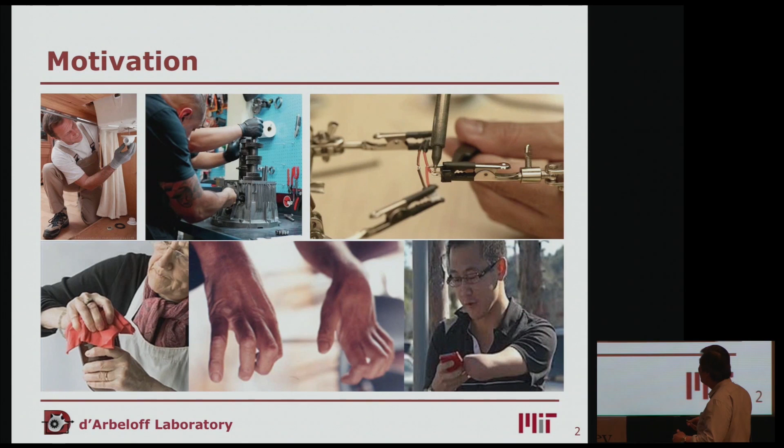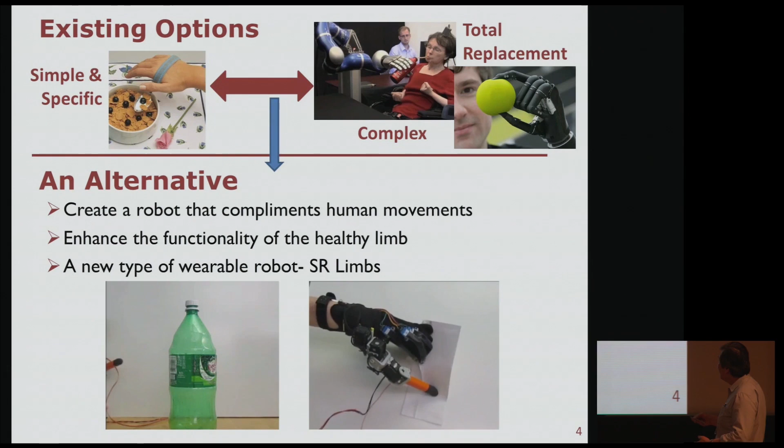If you have a hard time in the fingers or lose a hand, we can help you. But the traditional method is just using very simple ones or complex ones for total replacement. Our approach is to take the existing hand and provide a robot to complement the human movement, and we enhance the functionality of the healthy hand. You know how difficult it is to open it, like this? We focus in this paper on grasping. Grasping is the most fundamental part.

We explored many objects to grasp, and we did find that the 7 fingers have a very strong correlation among them. They don't move independently. It resembled the postural synergies in the neuromotor literature, and we hypothesized that there exist synergies even for 7 fingers. So because of the synergy, we must be able to control these robots in correlation to the actual hand you can measure. So we took a lot of data, 20 objects, 5 trials, including 20% validation data.

And you know Santello's famous work: 2 principal components of finger postures can explain 80% of the task. One is opening and closing in phase, and the second one is kind of a twisting action. Interestingly, even though you have 7 fingers, we got almost exactly the same results. The first one is just open, close in phase together with the robotic fingers, and then the second one and the third one. If you add all of these, you get 85% of the recovery.

So because of the synergies, we should be able to control these robot fingers in correlation with the human hands. So we'd like to find the control algorithms to control these. To do this, we first put all the human finger data into the input data space, and the robot finger postures in the output space. We try to find the functional relationship between the two based on partial least squares. So this is really a data-driven method.

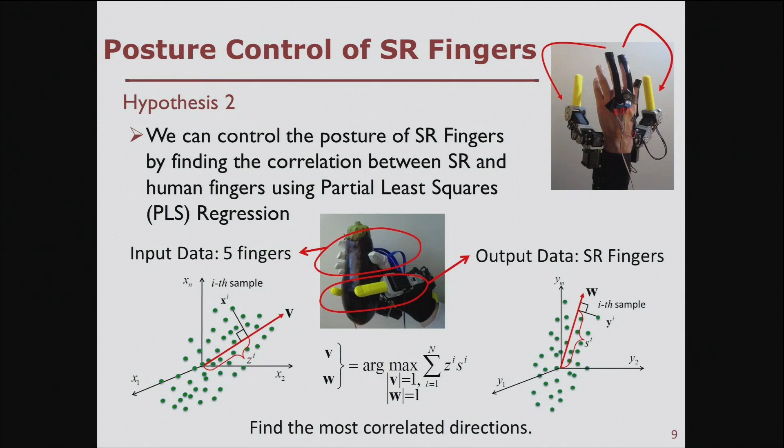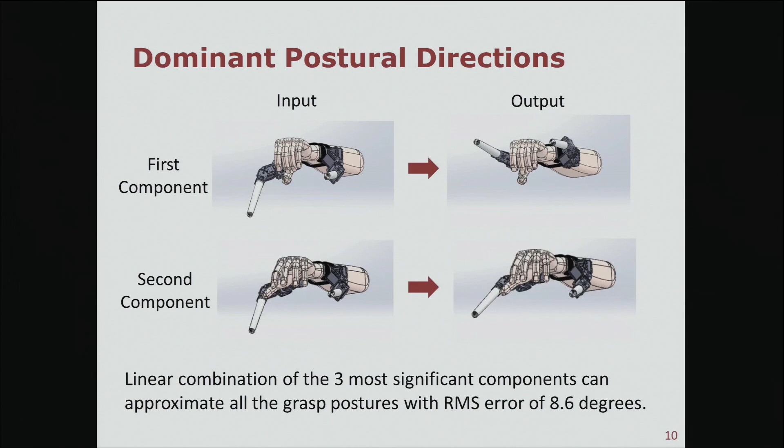The first mode shown next is similar to open and close of fingers in phase, and so did this set of robotic fingers. The second one is a little bit of twist motion, thumbs and the forefingers out of phase, and so does this robotic hand. Adding one more component, we can actually approximate almost all postures with very high accuracy.

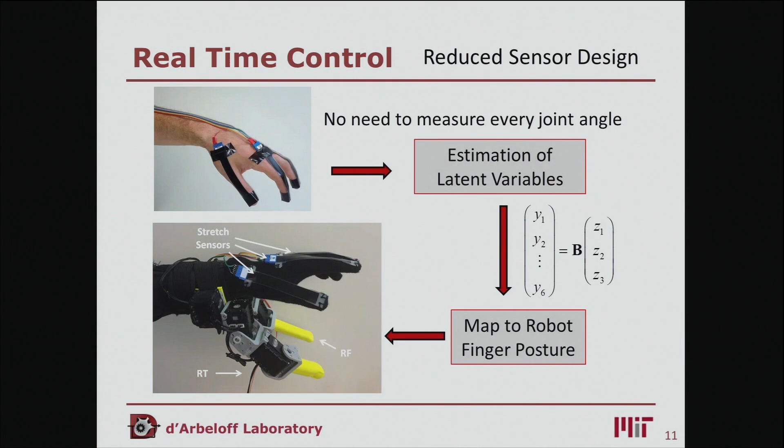So to implement this, to control the robot, you need sensors to measure your fingers. Remember that you need only 3 principal components, so we need just 3 sensors. And then expanding that to 6 DOF finger motions, you can actually drive this in correlation to your hand motion. So this is the first mode, and this is the second principal component. By linear combinations of these, you can generate all kinds of grasps.

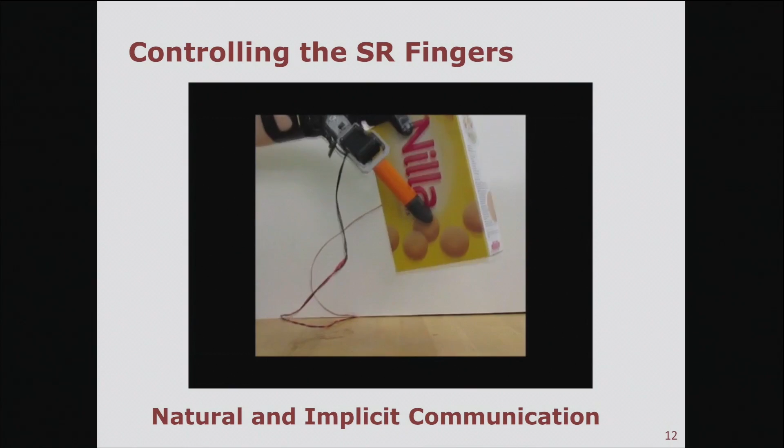So you can just naturally grasp it, and then the robot fingers follow. This is a very natural way; you prefer to grasp things in this way. It's very, very natural, implicit. You don't need to command the robots how to grasp it.

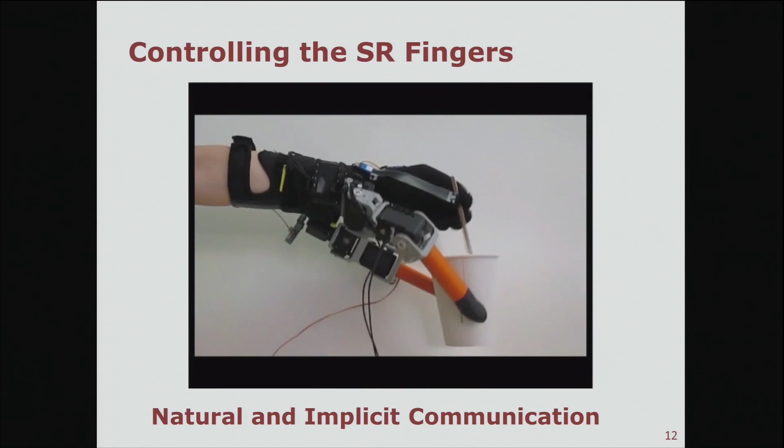Actually, based on this, we're exploring interesting applications. If one hand is busy, you can just do this, or you can open the lid, or you can actually manipulate the screwdriver. Even though you have one hand, you can work in a factory. So we propose supernumerary robotic fingers, and we propose synergy-based controls. You can control this.

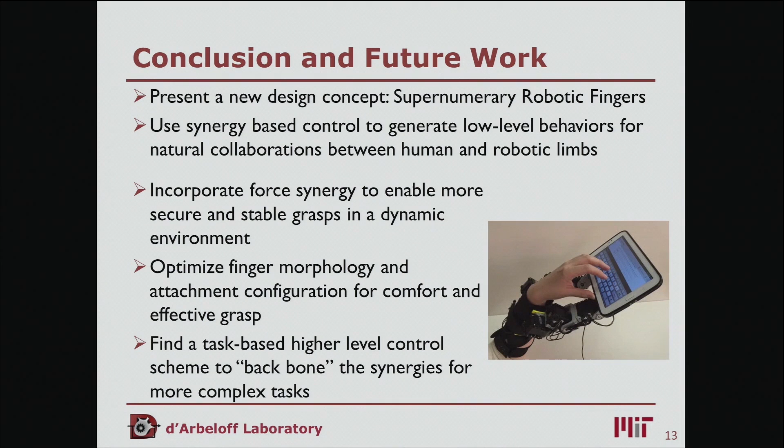Our future plan is to bring in some sensors, or optimize some mechanical design, and this can actually expand current work in many, many directions with so many interesting ideas coming out. So please join us to exchange more ideas.

Yes, I'm Eric Diller, and I'm at the University of Toronto. I'm going to tell you about some work we did while I was at Carnegie Mellon University involving the control of magnetic microscale robots. These devices at the tens to hundreds of micron size scale are appealing for their potential to give us direct access to tiny confined spaces. And we heard a lot about this earlier from Brad Nelson.

But we're interested in applying these microscale robots for the manipulation of microscale objects, as shown on the right, where one of our robots is manipulating some objects in an assembly task. We're interested in deploying them as mobile sensors in a distributed network, and of course for healthcare and bioengineering applications, as we heard about earlier this morning.

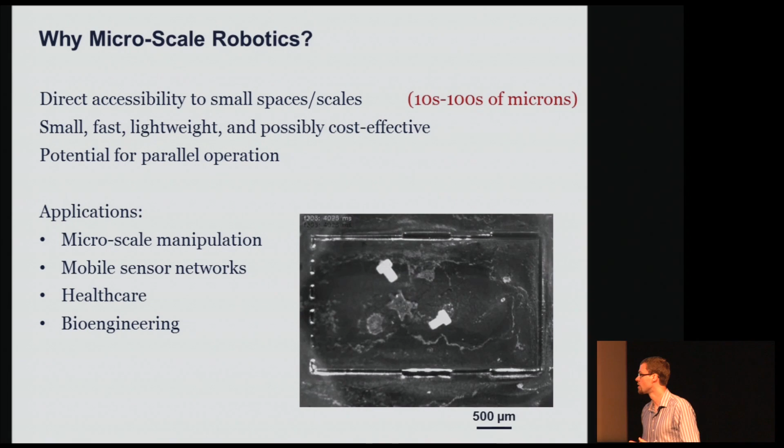Brad Nelson already introduced these same equations, where we can apply magnetic torque T, which acts to align our microrobot, which has magnetization M, with the applied field B. And our force pulls our magnetic microrobot along field gradient directions. And of course, these torques and forces are related linearly to the currents through all of our coils.

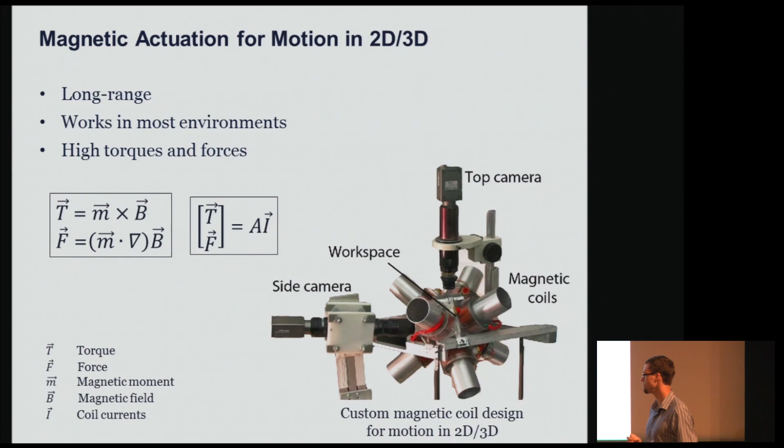This has allowed the community to design a lot of different motion techniques for microrobots using magnetic fields, including helical propulsion, crawling or rolling motions, levitation using magnetic field gradients, and even biohybrid actuation, which exploits some of the useful motion of microorganisms.

However, a critical limitation with this magnetic actuation is that we can only achieve 5 degrees of freedom motion in actuation. That is, we're lacking the creation of a torque about the magnetization axis. So this video illustrates the 5 degrees of freedom we can achieve: forces in any direction, and roll and pitch torques by rotating the magnetic fields.

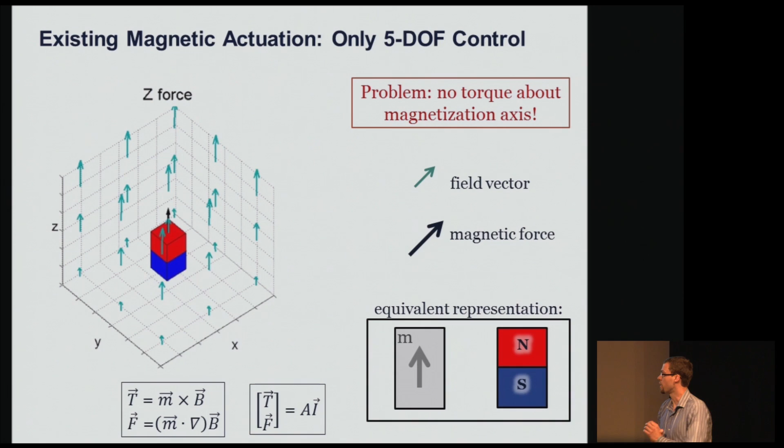But no matter what fields or field gradients we apply to this magnetic microrobot, which is modeled as a single magnet, we cannot create this rotation about the yaw axis, or the magnetization axis. And of course, this is going to limit how we can implement this for sophisticated microrobot applications, with microrobots moving in 6 degrees of freedom.

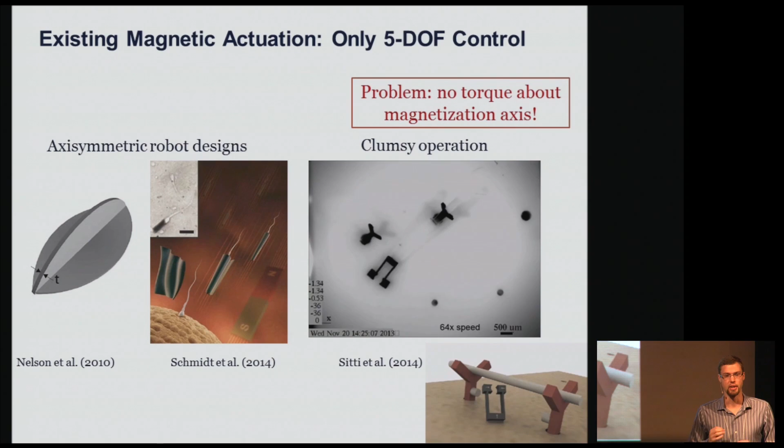One way we can get around this issue is to simply design our microrobots to be axisymmetric about this magnetization axis. However, for more sophisticated applications, such as what we have on the right, one of our magnetic microgripping robots trying to assemble objects in 3 dimensions for more complicated assemblies, in this case a 4-bar assembly, we're going to need full 6 degree of freedom actuation to achieve dexterous and high-speed operation with this type of task.

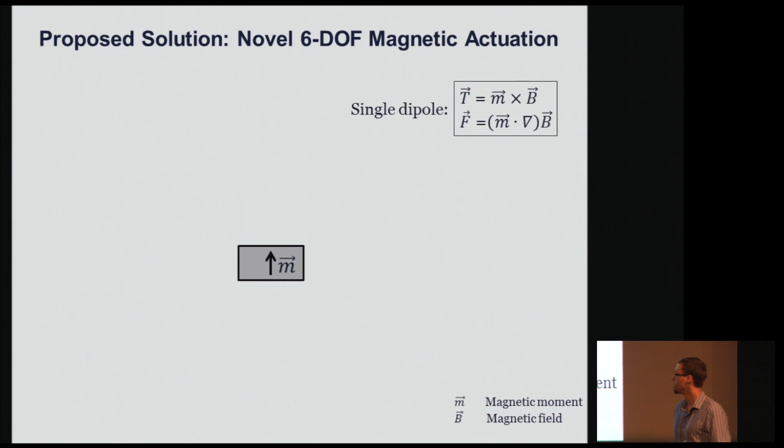So, we can easily achieve rotations about roll and pitch axes using applied magnetic fields. And we can create forces in any direction we like using field gradients. Our unique contribution in this work is to achieve the 6th degree of freedom actuation. We do this by relaxing the assumption that we have a single magnet magnetized in a uniform direction.

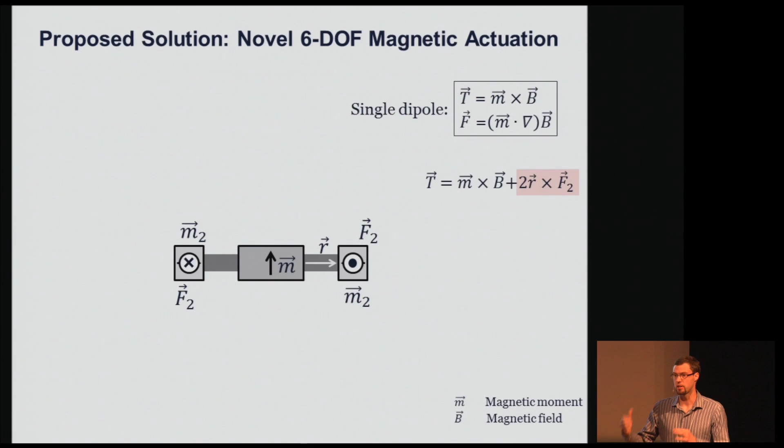One way we can do this is to add additional magnets to the side of our primary magnet, which are pointing in a different direction than this primary magnet. We can apply field gradients to pull on these side magnets in certain directions, which will induce a rigid body torque about our entire microrobot body. And by choosing the direction these side magnets are oriented, we can induce this torque about any axis, including about the primary magnetization axis, which is the actuation which we were not able to achieve previously.

We can do this without interfering with the original 5 degrees of freedom, as shown in this video. So we can create forces in any of the 3 directions, the same as before. And we can create roll and pitch rotations using uniform magnetic fields. Now, to create the 6th degree of freedom actuation, we use field gradients to pull on these side magnets to create this rotation about the correct axis.

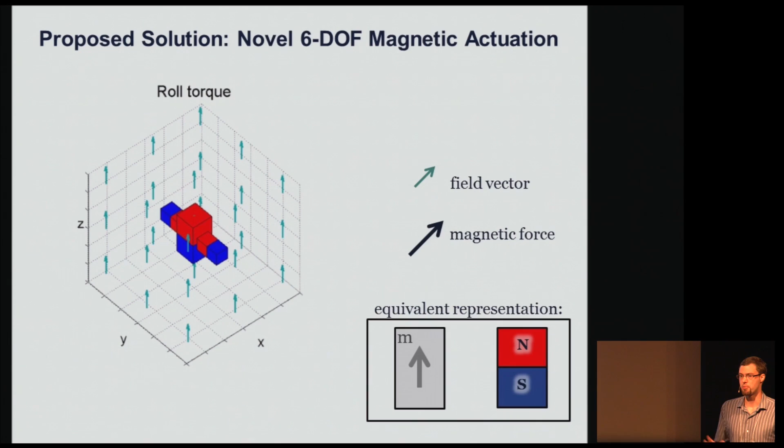Thus, we're achieving 6th degree of freedom actuation with a slight increase in the complexity of our microrobot device. But critically, we can do this with no increase in the complexity of our driving magnetic coil system. So we can implement this type of control in any driving system which could previously achieve 5 degree of freedom actuation.

At the interactive session, we'll give some additional details of how we've experimentally validated these new control results. We've investigated some interesting arrangements of discrete magnets which lead to reduced coupling between the applied forces and torques on the body and a simpler mathematical description. We found a solution for arbitrary magnetization profiles for permanent or non-permanent magnets. And we've designed some sufficient conditions which a microrobot designer can use to ensure that their design will achieve full 6th degree of freedom actuation.

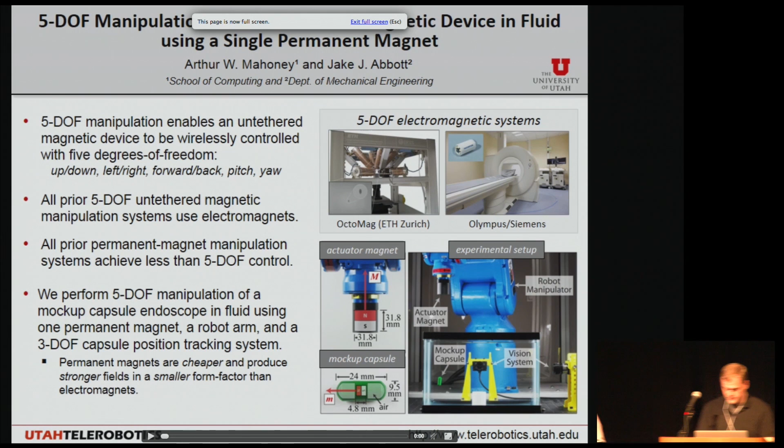I'm Art Mahoney, and I'm going to be describing some work that I've been doing at the University of Utah with Jake Abbott on 5 degree of freedom manipulation of an untethered magnetic device in fluid using a single permanent magnet. When I say 5 degree of freedom control, what I mean is the ability to wirelessly move a capsule, in our case, up, down, left, right, forward, back, and in pitch and yaw degrees of freedom.

The application that we're really interested in is capsule endoscopy of the human body, where a patient swallows a wireless capsule camera, and we manipulate it through the body using externally applied magnetic fields. Our experimental setup consists of a single permanent magnet that's maneuvered around in space by a commercially available 6 degree of freedom robot arm. We have a localization system, in our case we use 3D vision, to always measure the position of this capsule in space.

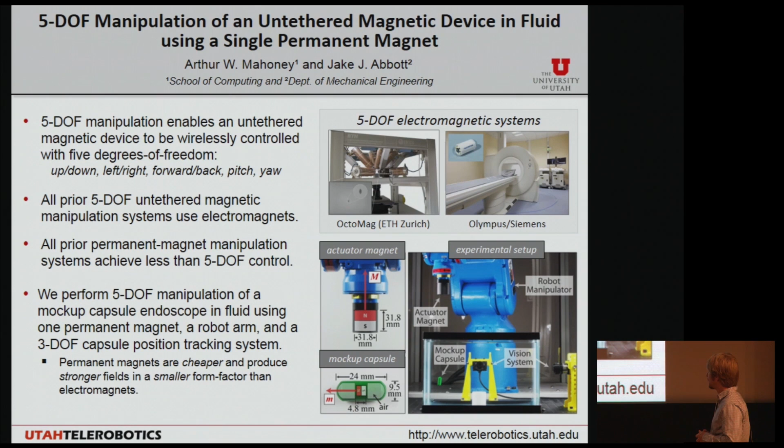The experimental setup is shown on the right in the bottom corner here. The green capsule is the device that we're actuating. All of our components are commercially available, and you can get the permanent magnets from a hardware store. Now, this is a somewhat complicated slide that describes some pretty simple principles. Basically, the idea is that if you take this untethered device and place it inside of a magnetic field, a torque is produced, which makes it align with the field, just like a compass needle.

In our case, the field is this dipole-shaped field that's generated by our external permanent magnet, the one that's held by the robot arm. To adjust the capsule's heading, we adjust the direction of this dipole field. Now, inside of a dipole field, a magnetic force can also be produced. The total force that acts on this capsule includes this magnetic force plus the capsule's weight. To control its position, we adjust the total force. Now, our system inputs into this whole manipulation system are the joint configuration of our robot manipulator. The system outputs are the total force applied to the capsule and this field heading.

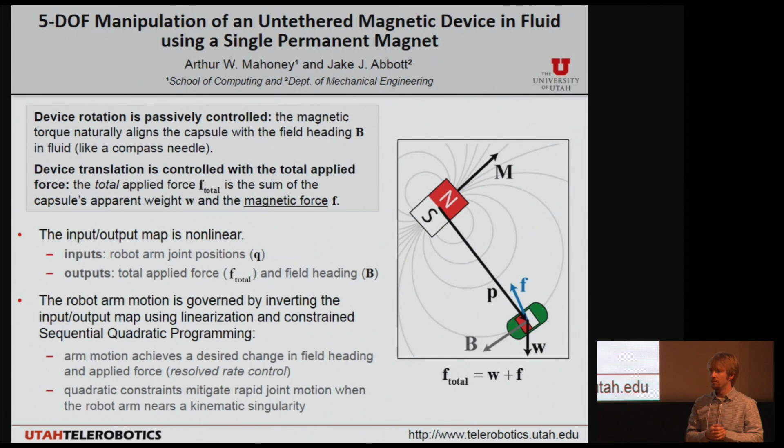Now, the mapping is nonlinear, and so what we've done is we've used a resolved rates method to implicitly invert the problem. We've also applied some constraints that I'm going to be describing later, which introduce some really interesting functionality. We implemented a PID controller that performs closed-loop control over the capsule's position, in this case using feedback information from our vision system.

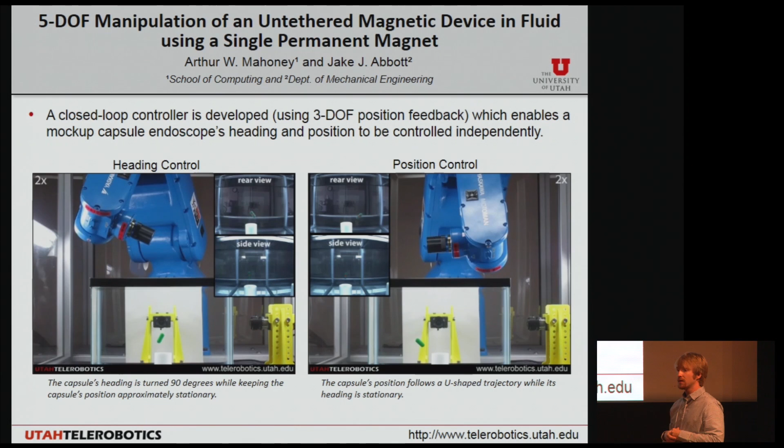Over here on the right is an example of keeping the capsule's heading constant while adjusting its position. In this case, it follows a square U-shaped trajectory where it first moves down, to the right, and then up. Again, notice that the actuator magnet isn't always directly above the capsule. You can see the cameras used for our vision system in the back.

So in the previous examples, we did independent control of position and heading. In this case, we're actually doing simultaneous control to follow this remote center of motion maneuver, which could be used to visualize a single point in space from multiple different views.

Now, we recognize that our vision-based localization system isn't really clinically relevant in the sense that if you have a capsule inside of your body, you can't really visualize it with cameras. Fortunately, there are localization strategies that exist. However, they operate at much slower frame rates. So we tested our methods, and we found that we can actually get down to localization rates of 30 hertz and still maintain pretty reasonable control of our capsule. The results are shown on the right.

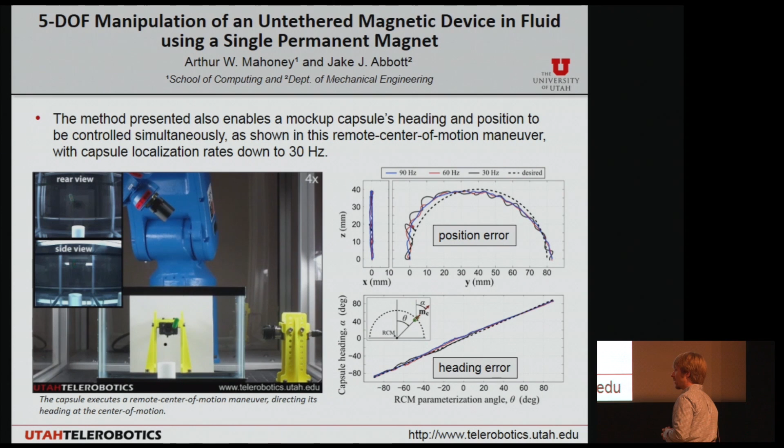This is really good for us because there are current clinically relevant strategies that operate at faster than 30 hertz. We think this really strengthens our argument that these types of technologies can appear in a clinic in the near future. Again, notice the non-intuitive behavior of that actuator magnet.

Now, there aren't any singularities per se in the magnetic field, this dipole-shaped field. However, singularities in the robot manipulator can actually introduce themselves as singularities in the entire manipulation system. What we've found is that if we sacrifice control of heading near these singularities, we can actually maintain control over the capsule's position. We do this by imposing some constraints on a resolved rates method.

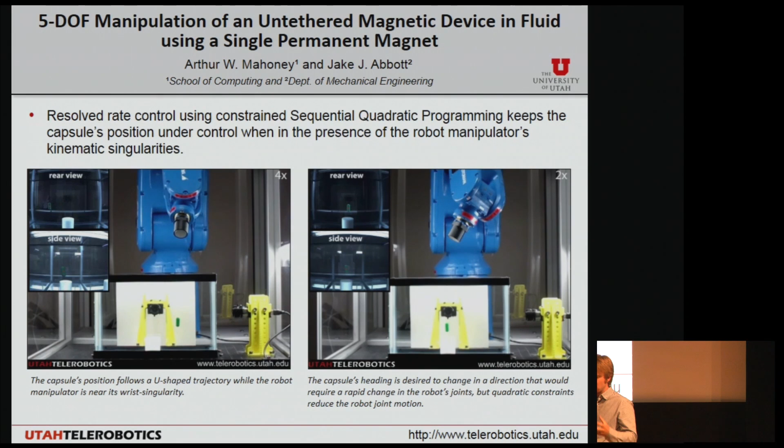This is demonstrated over here on the left, where that capsule still follows that same U-shaped trajectory. But notice that the manipulator is in its spherical wrist singularity. In this case, we don't have very good control over the capsule's heading, but as you can see, we still have pretty good control over the capsule's position.

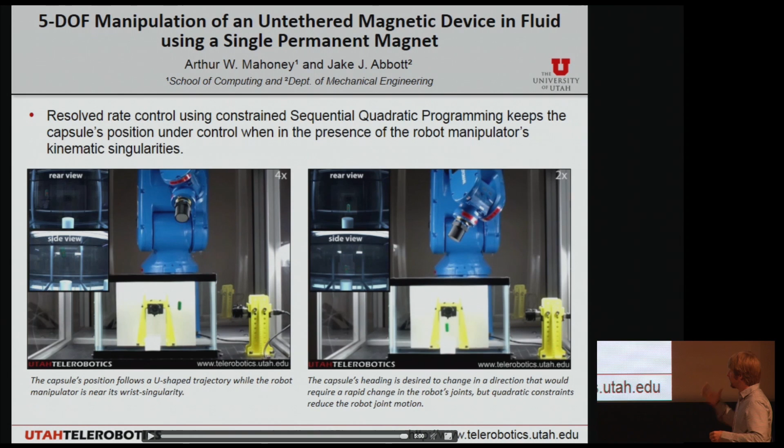On the right is an interesting example where the capsule is tasked with just levitating in space. The manipulator starts in a singular configuration. The user commands an input that ordinarily would require really fast joint motion, but what you actually see is our resolved rates method just naturally handles the user's input while minimizing the joint motion, and it also keeps the capsule in control.

And here the situation we envision is that you deploy a group of robots in the environment, and they have to perform a time-critical task. During this task, they encounter an unknown event, for example hardware failures, and they need to change their shape and relearn how to locomote. We are making two assumptions there. One is that the shape into which the robot reconfigures is perfectly known, meaning that we do not have to relearn the morphology of the robot.

And also, it was not a shape that we previously know, meaning we cannot use a lookup table in order to find the new control parameters for the locomotion learning. And the technique I'm proposing is to quickly relearn those parameters.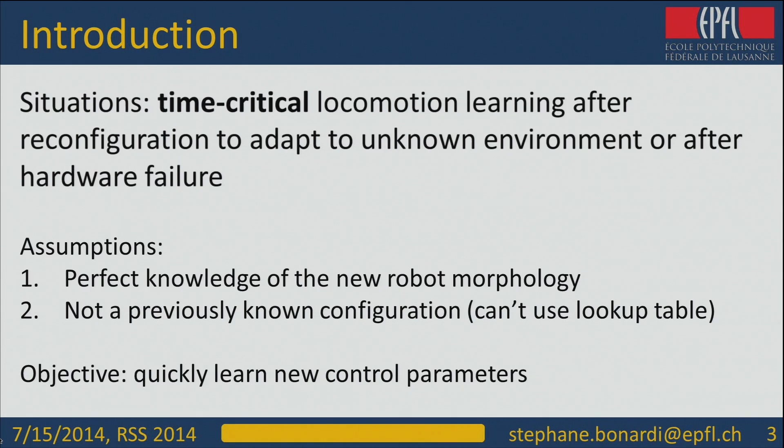So here the strategy we are adopting is that we will try to detect and identify bio-inspired patterns in the structures, like, for example, the body, the limbs, but also relevant articulations, like hip, spine, ankles. And we'll combine this information with symmetries in the structures in order to create a reduced control network. It will increase the speed of convergence to one acceptable solution.

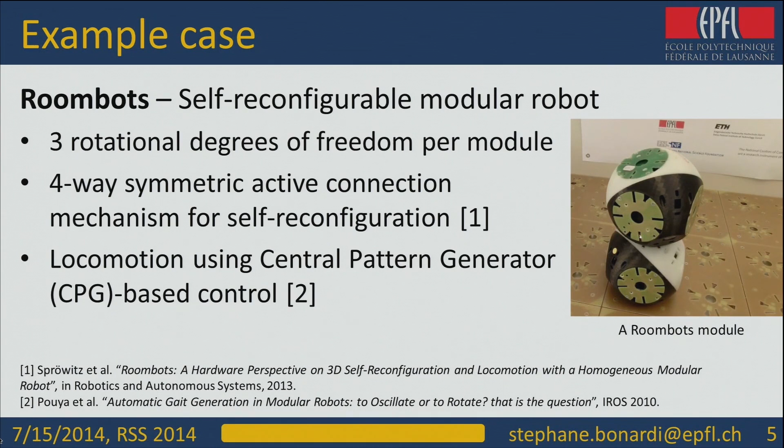So I'm going to show you an example of a test case that we envisioned to explain the method. So here we took 5 modules that we connected into quadruped-like structures. And one of the leg modules is connected differently to the main module in the center. So the corresponding control network here, the fully open case, that will be our baseline, is composed of 1 oscillator per degree of freedom. And each oscillator has 2 parameters to optimize. The first one is the amplitude, the second one is the offset.

And here we consider nearest neighbor coupling, meaning each oscillator is coupled to its nearest neighbor. And we have to optimize the phase difference between them. So here we end up with 15 degrees of freedom for the structure, and 44 parameters to optimize. Now we are going to apply our method to this system and identify the main body of the structure and the 4 limbs. And we reduce the number of parameters to 21 parameters to optimize with 7 degrees of freedom this time.

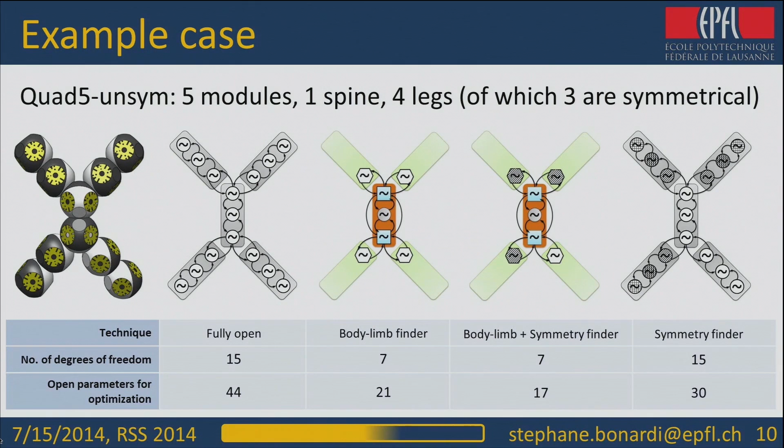If we further apply the symmetries to the structures, we can share amplitude and offset for the 3 legs, 3 oscillators that correspond to the legs that are symmetrical. And we further go from 21 parameters to optimize to 17. Finally, we apply symmetries to the fully open network, and we go from 44 parameters to optimize to only 30. And we'll compare all those different approaches and optimize them. And here you can see the results.

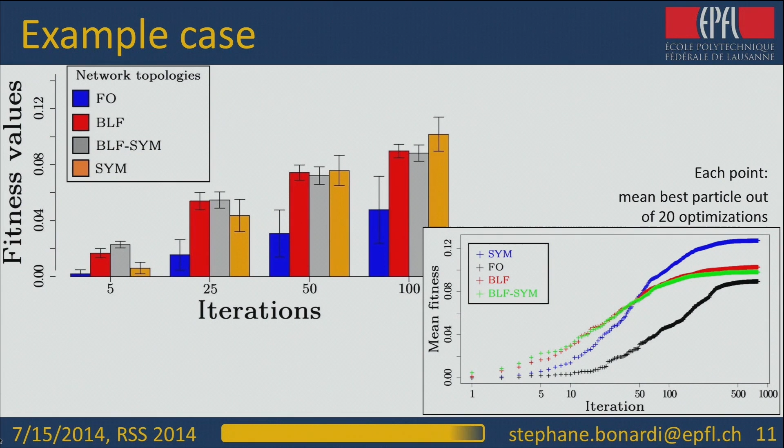So for the first few iterations, our methods, body limb finder symmetry and pure symmetry, completely outperform the fully open case, as we can show on the histogram and also on the curve, but this tendency tends to weaken as the number of iterations increases. So here is an example of the results that we obtain. And you have to keep in mind that we are in a time-critical situation. So we cannot wait for the full convergence.

And here, for example, 5 iterations cost 1 minute of optimization on our clusters. So at full convergence, which corresponds to around 800 iterations, it's almost 3 hours of computation. And here you can see that the tendency weakens a bit between the different approaches. So the take-home message is that we are proposing an algorithm to automatically detect bio-inspired patterns and symmetry, and to use that information to provide reduced control networks that significantly outperform the fully open approach in the first 30 iterations by a factor of up to 10 iterations.

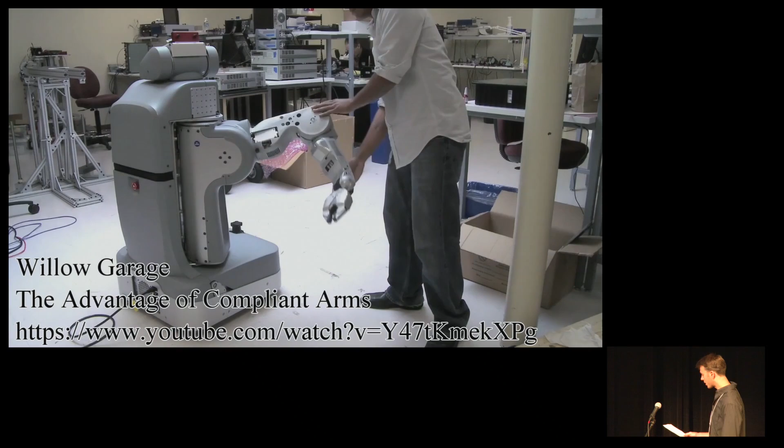Hi, I'm Matthew Piccoli from the University of Pennsylvania, and I'll be talking about cogging torque ripple minimization, or what we call anti-cogging. Lots of robots require high torque, direct drive, or low gear ratio actuators, such as human-safe back-drivable robotic arms, haptic devices, and high-fidelity position control.

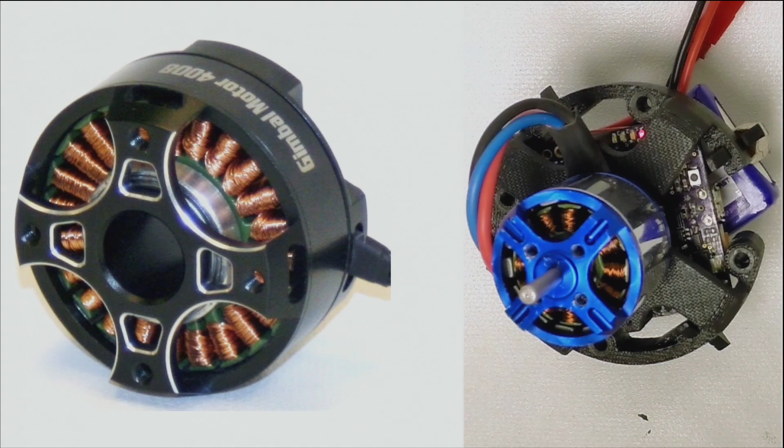But the motors in robots tend to be expensive. Why use motors like this when there are motors that are rated to the same torque, half the weight, and a third the cost? This motor should run smoothly, but it doesn't because of torque ripple. Across a wide range of motors and electronics, torque ripple and cost are inversely related. Here on the x-axis we have cost, and on the y-axis is the torque ripple ratio, which is a measure of torque ripple, and you can see that cheaper motors have more torque ripple.

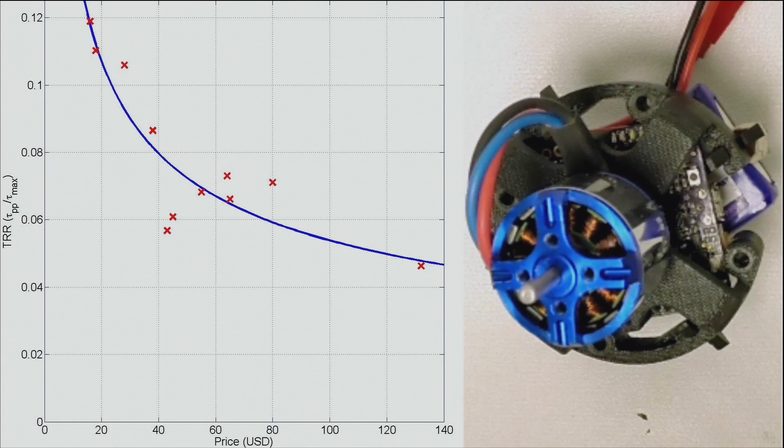In these applications, computation electronics often hold a large portion of the cost, but with Moore's law and consumer electronics continuously driving down prices, actuators become the dominant cost, relatively speaking. Let's look at the 3 main sources of torque ripple to see if we can help this situation.

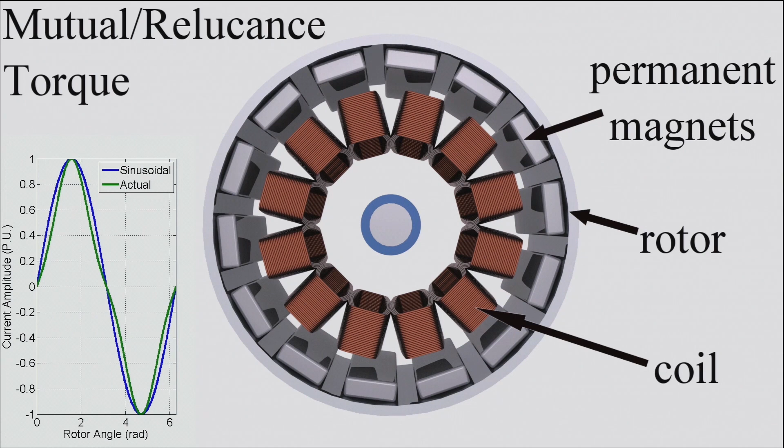Mutual and reluctance torque are when current flows through the coils, causing a magnetic field that reacts with the magnetic fields in the rotor. Ideally, the shape of these currents with respect to the motor position should be sinusoidal or trapezoidal to make the motor spin, but in reality they aren't, and this shape discrepancy causes a torque ripple. Voltage and current sensors can measure this discrepancy.

Cogging torque, also called detent torque, is when the permanent magnets attract the stator's core. Unlike mutual and reluctance torques, cogging torque cannot make the motor spin continuously, only contributes to torque ripple, is always present, and is only detectable with mechanical sensors.

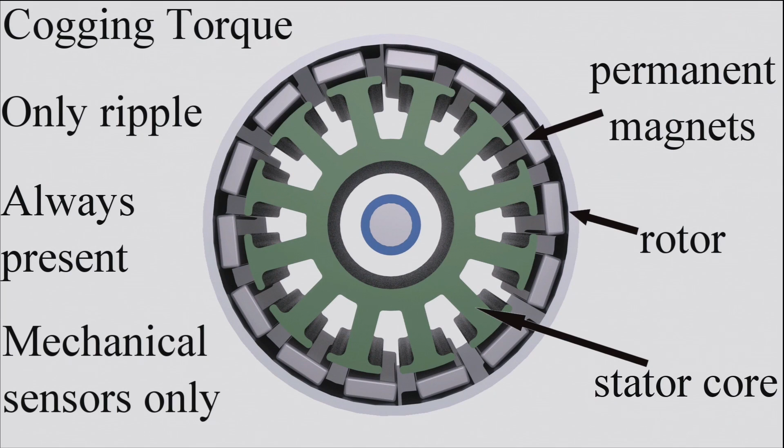Torque ripple has been heavily studied in the last 25 years, and most of the research falls under 2 categories: software methods for mutual and reluctance torque ripple minimization, and hardware redesign methods for cogging torque ripple minimization. But can we combine these 2 philosophies to minimize cogging torque ripple with software? Holtz and Springob laid down the foundation for cog mapping by iteratively monitoring current, while a speed loop tried to hold speed constant. We extend this to 2 methods without requiring a speed controller, a current sensor, or iteration.

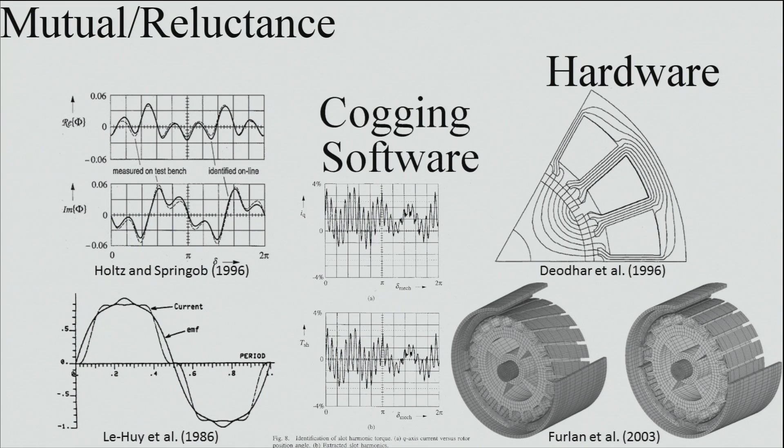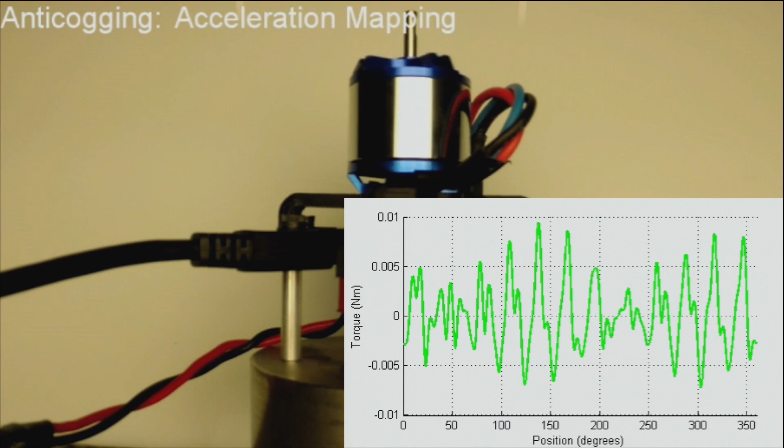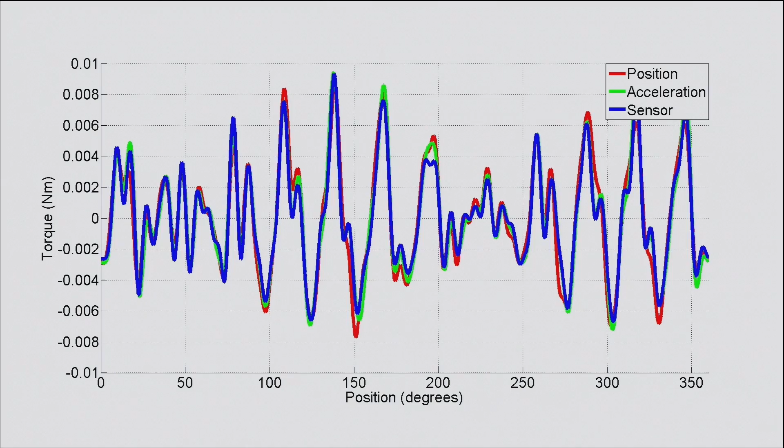The first method is to use position control at every position and map the applied voltage or current when the motor is stopped. We can also compensate for static friction or stiction and transistor dead time with this method. The second method is to spin open loop as slowly as possible and map the accelerations. You can see these 2 maps agree nicely with each other, but to double check, we used a force torque sensor during testing to validate the 2 methods. Now, we can invert the cog map and feed forward these torques, currents, or voltages.

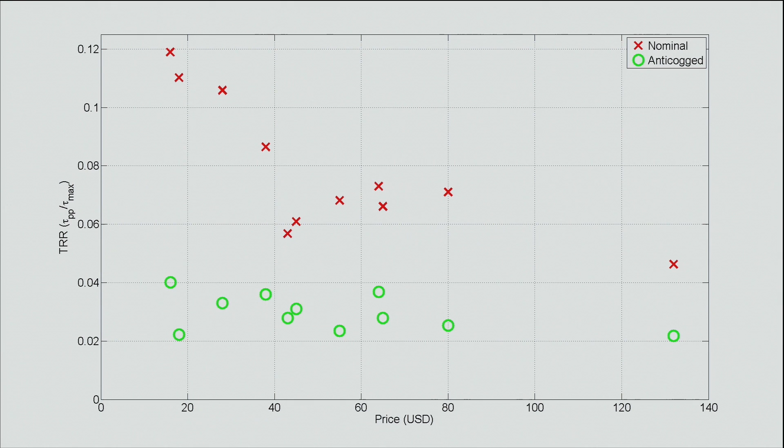We tested both methods on 11 motors. This is the same graph as before with price versus torque ripple ratio, but now with the anti-cog motors. You can see what was once an inverse relationship is now roughly constant with an average of 69% reduction. We think PWM resolution is the cause of this constant. You can see peak-to-peak torque ripple is on the same order of magnitude as the PWM resolution, between 1 and 5.5 counts. So we doubled the resolution. A motor that had 69% reduction went to 82% reduction simply by doubling the resolution.

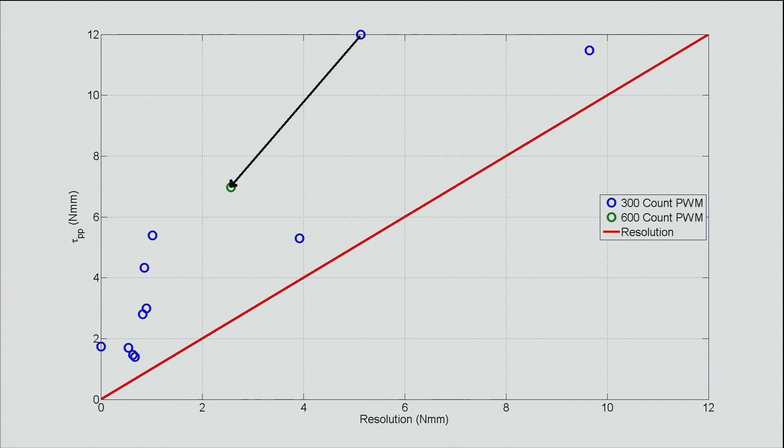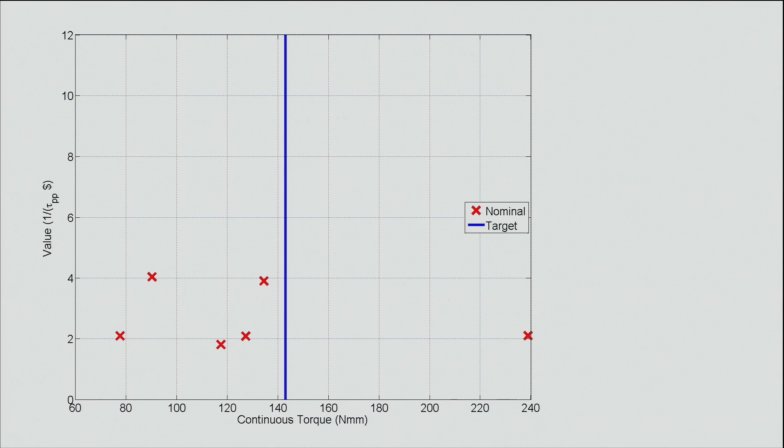To verify that anti-cogging works in robotic applications, we made a robotic arm modeled after a Phantom Omni. We looked at the motors with a torque rating within a factor of 2 of the Phantom Omni's continuous torque, then ranked them by performance and economic value, which we defined as the inverse of peak-to-peak torque ripple times cost. The naturally smooth E-flite Park 400 has the best value, but after anti-cogging, the naturally rough Exceed RC Rocket 400 had about the same peak-to-peak torque, but only cost a third and was the cheapest tested motor.

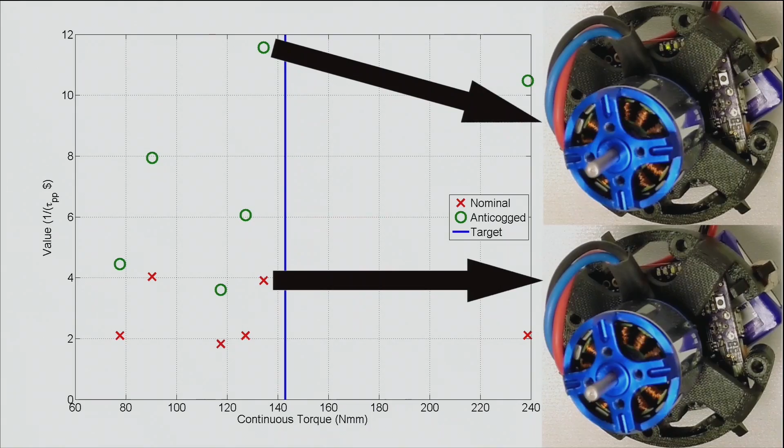We used an updated motor driver with an even higher voltage resolution, as well as wireless communication, so that no wires cause friction by crossing over the joints. We ran the arm along various trajectories, including this 36-line segment, 2-meter trajectory, where the arm has a root mean squared error of 7.4 millimeters without compensation, while with compensation, the error was 3.5 millimeters, which is a 52% reduction.

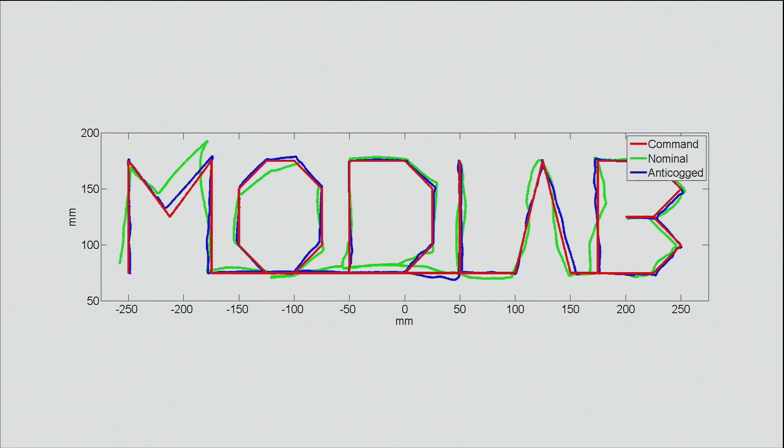We brought demos. Both motors from this arm are on display during the interactive session, so you can feel the cogging torque with your own hands and then feel it disappear. We also have a handful of other motors, so you can feel the difference between expensive and cheap motors. So here's anti-cogging turned off, and here's anti-cogging turned on. And here's the desired trajectory along with the same 2 paths generated with encoder values. As you can see, you can now get good performance from really cheap motors.

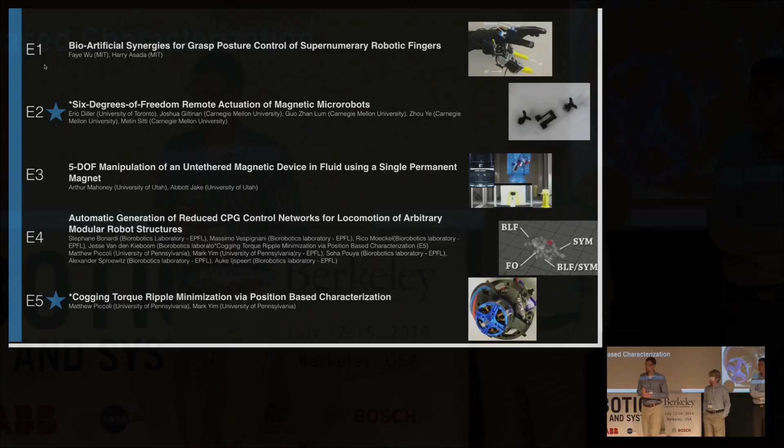When you're modeling your system, do you just model all the forces as dipole-dipole interactions, or do you do any sort of near-field modeling? So the traditional way to model a microrobot is to consider it as a single dipole, and then the fields from the external coils are assumed as uniform fields. So if we have a dipole assumption, then it's a great assumption to make.

In our case, with the distributed case, if we have discrete magnet elements, we can treat each one as a single dipole and do the modeling that way. Or we can do a continuous integration of forces and torques over the entire volume for more precision.